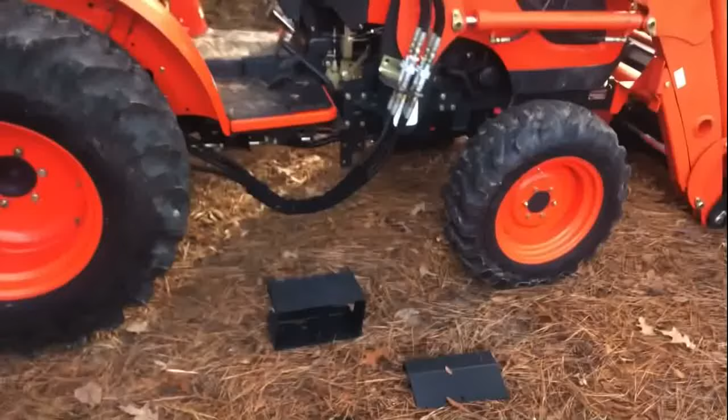Okay, so my grapple that I have on the front of the tractor, which is not on right now, has been running off of rear remotes, and they were coming off from back here running underneath the tractor. They were actually ran through that little foot pedal bracket underneath there, which was causing my pedal to hang up a little bit, and strapped up, come up the loader arm and just were hanging in the front. And I wanted to go to a true third function kit.

So I bought the Kioti third function kit. I think I'll be able to handle it. I went ahead and mounted this bracket here. That was a no-brainer. And I mounted that bracket there, no-brainer, because those things were obvious. But the rest of the stuff I'm going to try to do in order. And so far, like I said, I haven't done it in order yet, but we're going to do the rest of it in order.

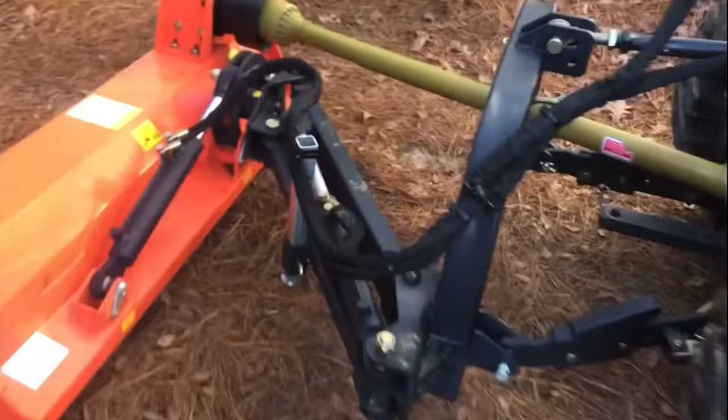And the reason why I wanted to get a true Kioti third function kit is because we got this flail mower, which has two hydraulic cylinders. And so I needed my rear remotes to operate this implement, or attachment. So that's one of the reasons. The other reason is because there are times when using these levers here to operate the front grapple, which I have parked over in the woods right there, would be a little tricky.

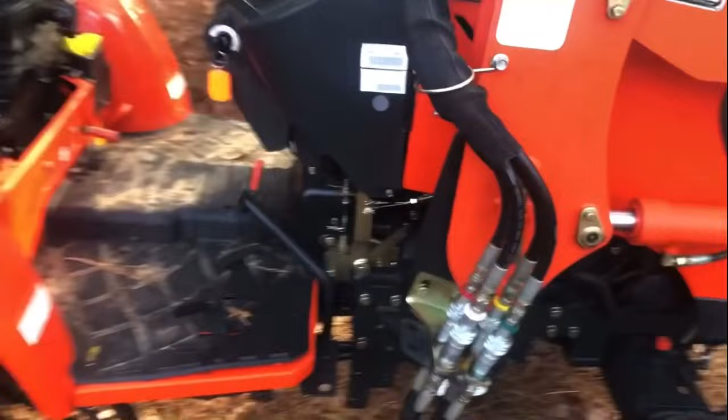So I said, you know what, I'm going to go ahead and get a true third function, and we're going to try to install that today. I'm going to put this video together in pieces as I go and fill you in on my experiences.

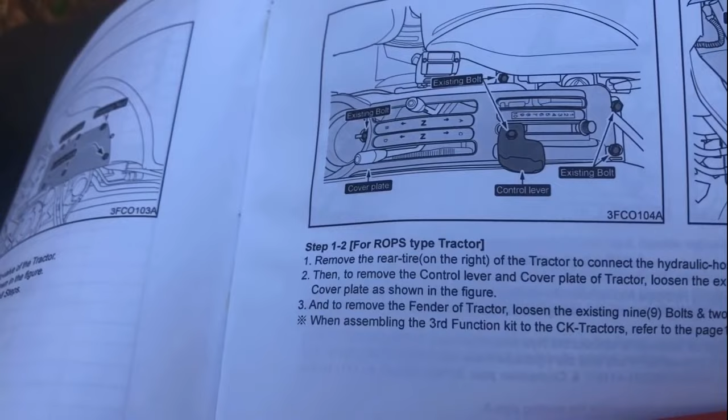Okay, so for step one, it says remove the rear tire on the right side of the tractor to connect the hydraulic hoses to the hydraulic valve of the tractor. And to remove the fender of the tractor, loosen the existing 9 bolts and 2 nuts as shown in the figure. When assembling the third function kit to the CK tractors, refer to pages 1 and 2, parts layout of all steps.

Okay, so we've detached the rear flail mower, and we're going to proceed with removing this tire. Now, ideally, I'd have a nice level ground spot, but this is what I've got to work with right here. I don't have a nice concrete shop floor, so we'll be doing this out here, and I'm gonna throw some cardboard and plywood underneath it to try to catch anything that I drop. Okay, so I've got my cardboard in place. I've got some blocks that we're gonna put the rear axle on this side, and my cheater pipe to break these nuts loose.

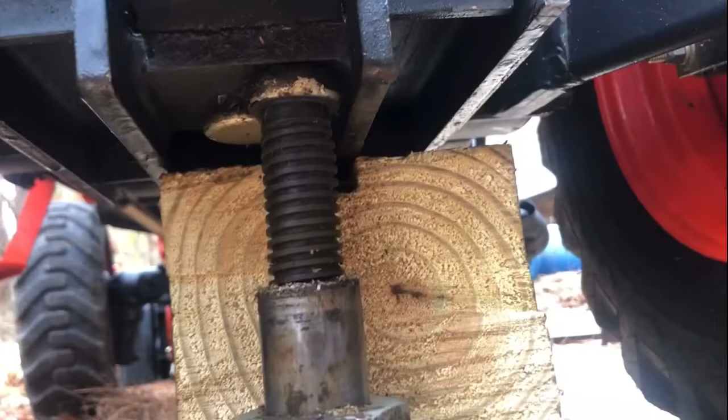Okay, so I jacked my tractor up just slightly on the right side of that tow bar pin, and I've got some blocks that I'll lower it down on once I get the tire removed. And you can see here I'm just taking these nuts off, and we'll just roll the tire to the side. So that's where we are right now, just loosening these up. Excuse the quality of the video, just trying to show you the various steps.

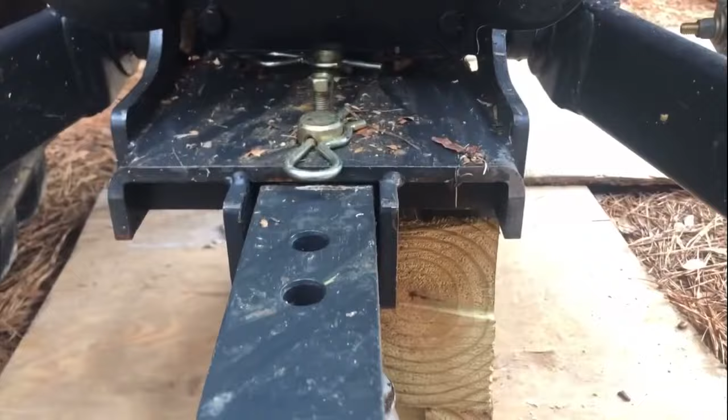Well, believe it or not, that wasn't that bad. So now we're just going to lower the jack onto these blocks of wood for a physical instead of a hydraulic hold. You can see it drop down. So we are good now, and proceed to the next step. That was actually pretty simple.

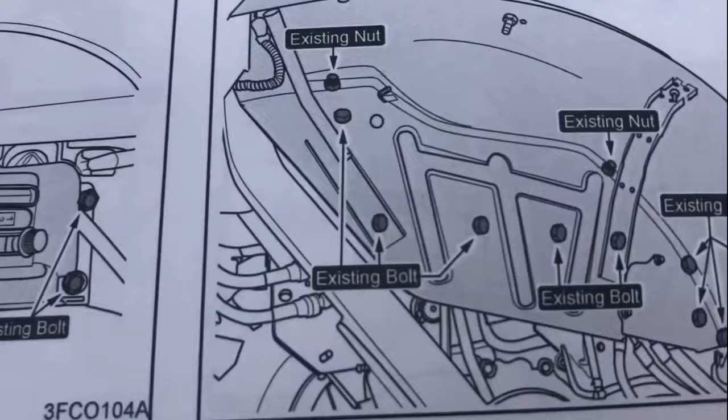Okay, so it says next, to remove the fender, loosen the existing 9 bolts and the 2 nuts as shown in the figure. So here is the figure. Okay, so up here you need to disconnect this plug here for your rear blinker, and also pull these out. Green goes to red and black goes to black. So that way when you take this panel off, you don't tear up your wiring.

Okay, so these plugs that I just talked about had to go through those 2 holes. There was a rubber gasket there. You just pop it out and it slips through. Okay, so now the fender is off. Wiring harness for the lights are out of the way, and we'll proceed to the next step. So there's our fender with our bolts and our tire. Things are going good.

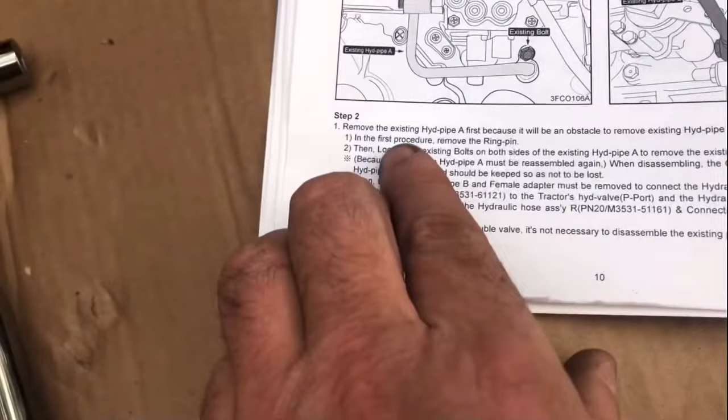Okay, so next it says remove the existing hydro pipe A first, because it will be an obstacle to remove existing pipe B.

So that's existing hydro pipe A, and this is existing hydro pipe B. B is above A. So here's A and here's B. This is the top of A right there, and so B is going to be right here.

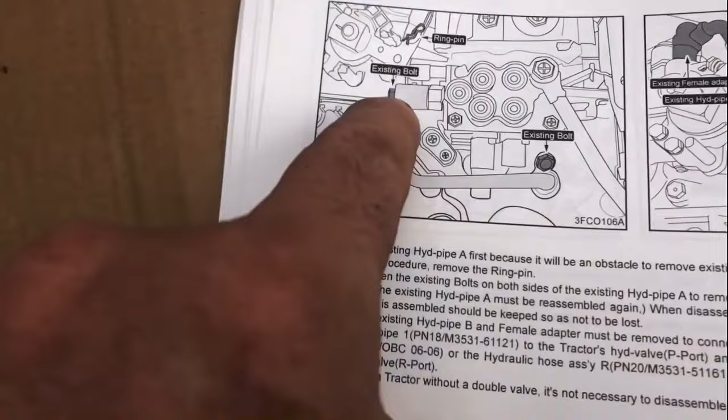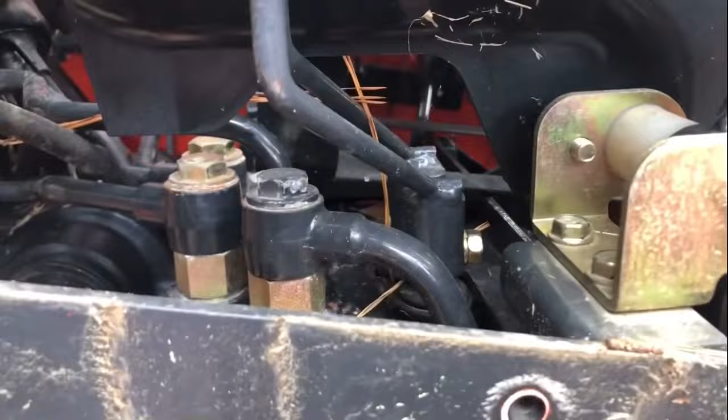If we look at the tractor, here is A, and then B is right above it. B goes up diagonally to the top through this, behind that linkage there. That stuff's all in the way, but that's the top of B. There's the bottom of B, and there's the top of B.

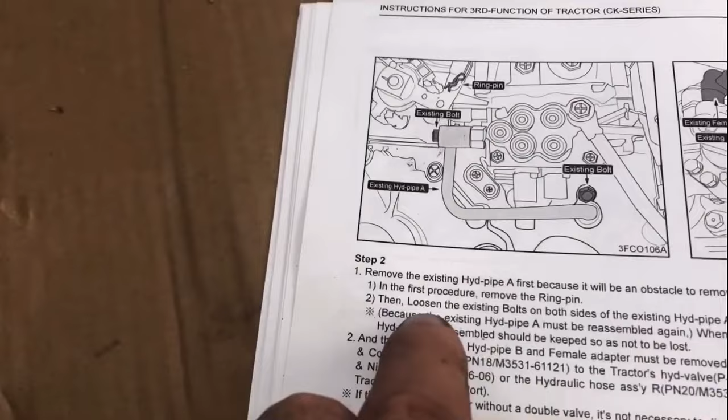And then here's A. If we're going to remove A, it says loosen the existing bolts. In the first procedure, remove the ring pin. There's your ring pin right there. We'll put this in a bag. I'll put it right here actually. First procedure, remove the ring pin.

Then loosen the existing bolts on both sides of the existing hydro pipe A to remove the existing hydro pipe A. So we're going to have to loosen this bolt here and this bolt above right there. So they're going to loosen that bolt and then this bolt.

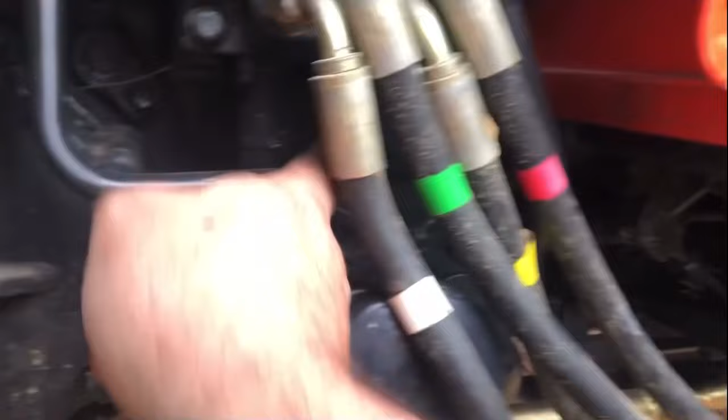So for me to get to the top of this A over here, I have to come in through here, and my socket is just barely short. Now, in the pictures, in every tractor I've noticed this top hydraulic line was pointed off this direction, and mine's pointed this direction, which makes it really tight. So I'm going to remove this and put it back at this angle like in the picture and see if that provides a little slack.

That'll allow me to also turn this one a little steeper so it won't be coming over my filter here, which is something else I've noticed that seems atypical. Does that matter? No, but I'm going to get this arrangement of hoses lined up a little better so I have clearance to reach that bolt. I've changed the orientation of these hydraulic lines, and it makes a difference on multiple things, which I'm going to point out.

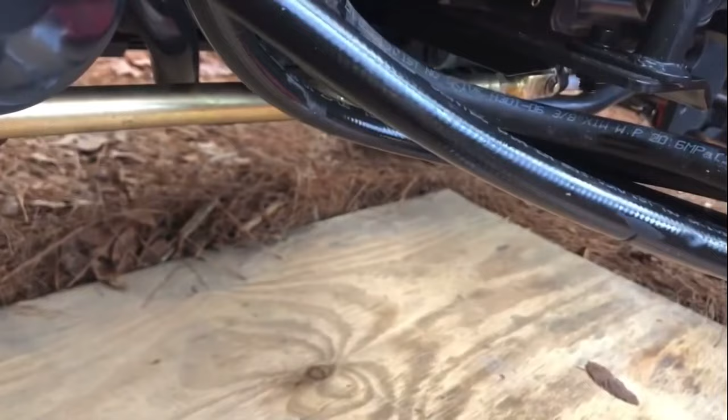It's my understanding, I can't swear this is true, but I believe the dealers actually mount the front end loaders to these tractors, and if that's true, the dealer would have mounted these, and the orientation did actually matter. They also had my lines ran through this bracket here, which in my opinion was not a good idea because it would cause my steps to sometimes stick, and I noticed it was rubbing on one of my lines here. I'm not sure which one, but one of these lines has a little wear on it.

So when I put this bracket on, I pulled the hoses out of this sock and took them out of that step. But to keep them from snagging, I can easily pop them up in there and put a zip tie on the back side, and they'll still be elevated without hitting my hydrostatic pedal. The other thing is, now I've got enough gap that I can fit this wrench in here and get on that bolt. Barely, but I'm on it. This eliminates that problem just by having these hoses oriented the right direction.

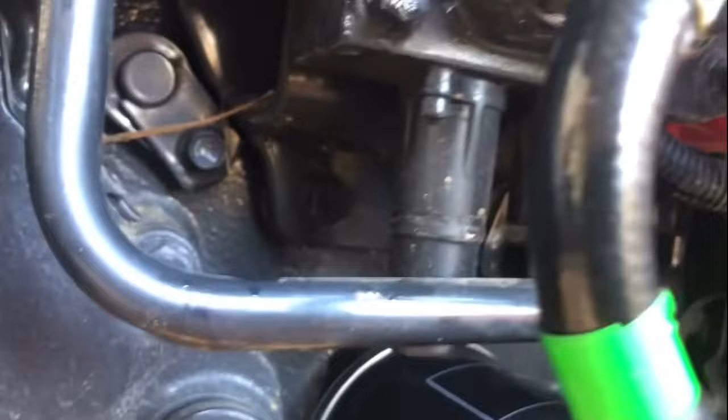Okay, so I got that front bolt, let's see if we can find it here in the camera. I got that front bolt off right there. You can barely see it between those two right there. That's it, got it out.

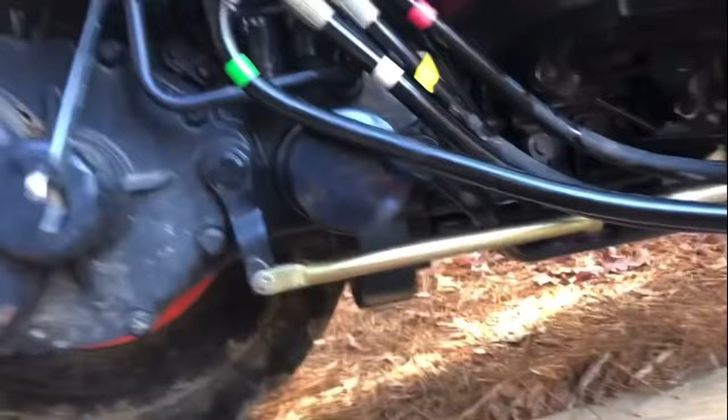Now this one here is pretty darn snug. We've got a 19mm wrench on it, so I'm actually going to have to try to put a pipe on there or something, it will not come loose. Well, I'm going to crank on it and see what happens. My pipe won't fit, so I'll just pull a little harder and break that free. Of course, lefty loosey.

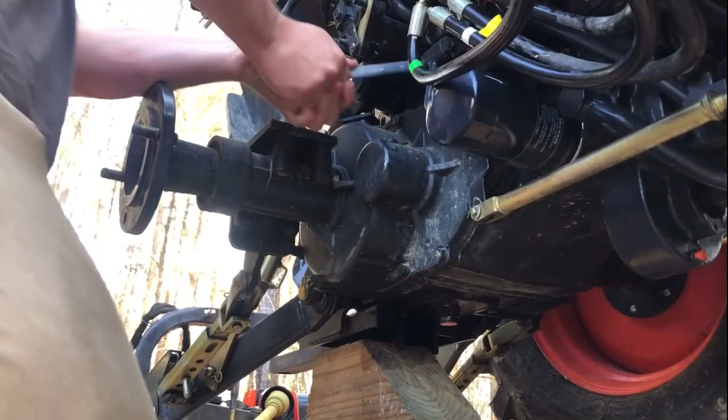I don't know if my alignment there is good, hopefully it'll work. There we go, may have been painted on, I don't know. It actually came off easier than I thought. I snugged on it a little bit, but I only did it with one hand the first time, and it was tight. But there, it's coming off pretty easy, so my bad, it was not too tight, I didn't need a pipe. So that's good when things work well.

So this should allow me to remove pipe A, what they call pipe A. Of course, we're going to save this here. It's got a little hydraulic fluid on it, let me clean that off so it doesn't drip too much in my socket set. Now this should come on out now. There we go, look at there.

It must have a sleeve on it. Well, it's loose. There it comes. All right. Yeah, I knew it had to have a sleeve on it the way it was not just pulling out.

So we got that off, and things are coming along. So far, not too bad. I'm pleasantly pleased with the way things are going. So let's see what's next.

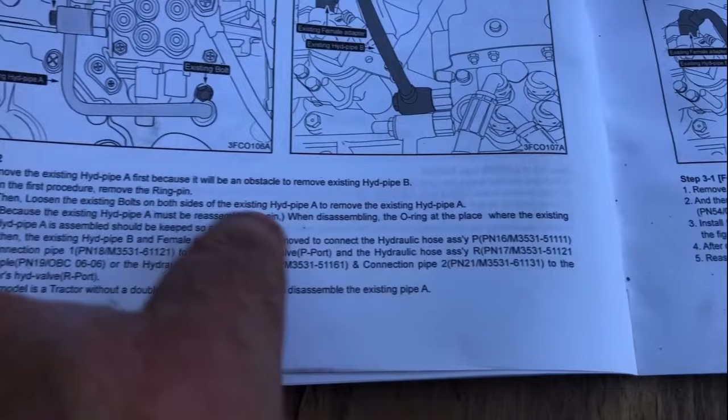It said after removing pipe A, that A must be reassembled when assembling the O-ring. When disassembling the O-ring at the place where it is existing, Hyd-pipe A assembled should be kept so it's not lost. So we kept those O-rings right there, and of course there's an O-ring on there. Let's see, and there's an O-ring there.

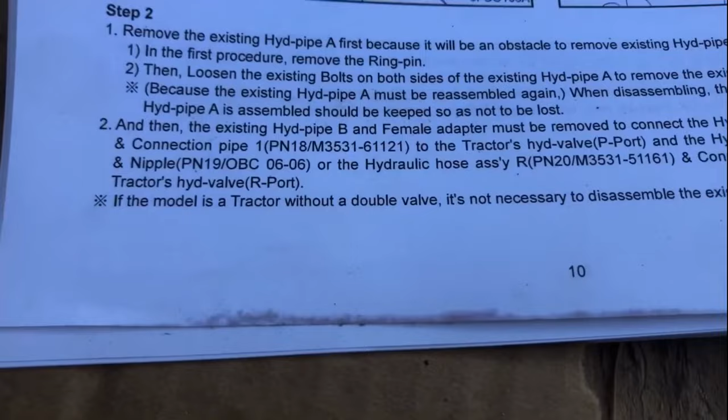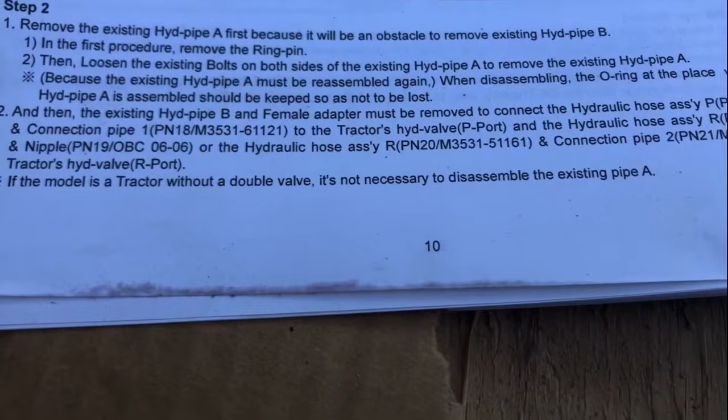Okay, next it says number 2: the existing Hyd-pipe B and female adapter must be removed to connect the hydraulic hose assembly PN16. So we're going to put the PN16 on there with the nipple PN19, or hydraulic hose assembly RPN20, and connect pipe 2 to the tractor's hydraulic valve R port. So we'll stop the video and get my hoses together for that.

So what we have to do now is remove this one and this one. Okay, so my next dilemma here is when I loosen this bolt, this spins with it. So I've got to find a way to stop that from spinning. On the pipe A, that was not a problem - that was pretty rigid and it unscrewed.

But on this B, every time I turn this one counterclockwise, that one just turns with it. So we're going to have to find a way to hold that. And I don't want to really remove this one. So we'll see if I have a crescent wrench long enough to reach over both of these to grab that one and see how that works.

Okay, so I noticed there was a second clip up here for that rear remote. So I've removed that second clip, which allowed me to remove this piece here and get it out of the way. It gave me more room. And I noticed that because as I was trying to loosen this...

19mm nut right here, it slipped and I had a knuckle buster. The joy of being a mechanic - as I pulled that wrench, it hit there. So I have to put a crescent wrench on this nut, because that nut is just turning as I turn this nut, which allows the whole thing to just spin. So that obviously is not going to work.

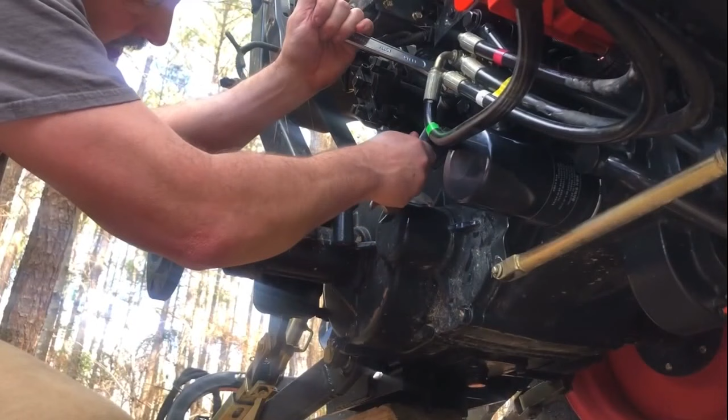Don't know how this angle's looking on this camera, but hopefully it'll work. I'm going to turn it this way so I don't bust my knuckles again. There we go, got it. Now we got that out, we can use the other end to get that off. So that was absolutely necessary to get a crescent wrench to stop that from counter turning.

Okay, so we'll just remove that pipe B now, and we'll pause the video. So I'm just going to take that out. Take this nut out, pull this end off, and we'll take that nut out and pull that off.

Okay, so we've got that nut removed, and we maybe lost 2 ounces of hydraulic fluid. Nothing to get upset or excited about. And now we're going to remove this nut here, and hopefully that nut down underneath doesn't spin. We'll see how that goes. All right, good.

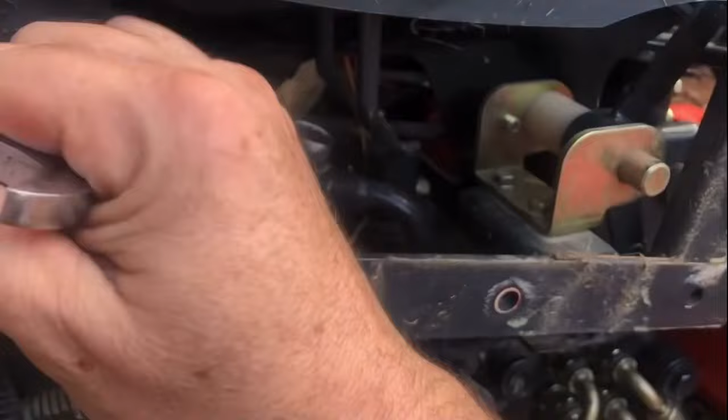So now we'll just continue to remove this so we can get pipe B out of the way. Make sure you keep your gaskets. You'll have to excuse any poor camera work, I have not done this before, so we don't want to lose anything.

I'm going to set the camera down and get this out. Okay, now it says that once you get that piece out, you're going to connect that new assembly into where we just removed B. So now that I've got B out, we've got two open spots here.

These are vertical, so I'm not too worried about that, but I went ahead and put that bolt in there to prevent any dust from blowing in there while I'm working outdoors, because we're having some windy weather and I don't want any pine straw to fall into that hydraulic system. So I just put that in there to seal it until I proceed to the next step.

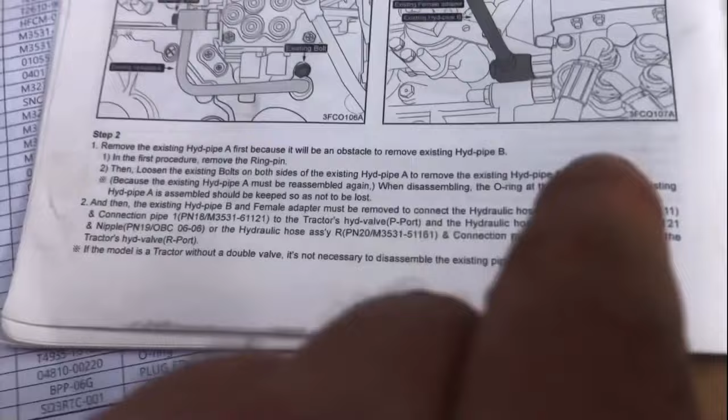Okay, so when we're installing these new hydraulic pipe fittings, I was running into a little bit of confusion, and then I realized what's going on. If we look at the part number here in these manuals, those are not correct. But if we look at the item number, the real part number after that slash mark, those are correct. So we have to use these numbers and not the PN numbers, okay?

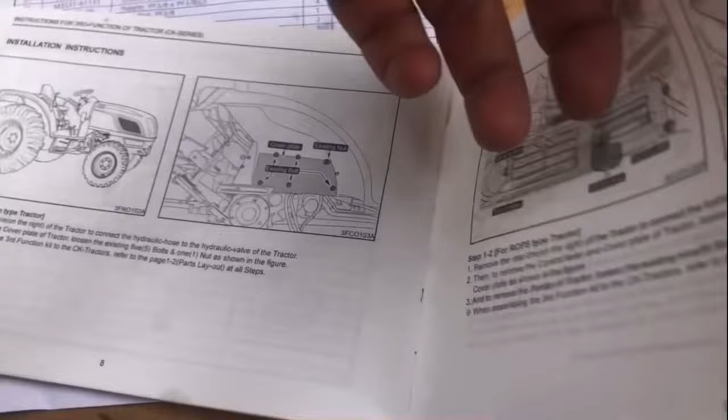That's issue number one. The second thing is that I don't have a cab tractor. So I was doing step 2, and step 2 is described - if you look, it says for the ROPS type tractor for step 1, for the cabin type tractor step 1, but when you get to step 2, it doesn't specify what. So I was going through this, and I noticed that some of the things I was looking at didn't quite actually match what I was looking at as I was transitioning from step 2 to step 3.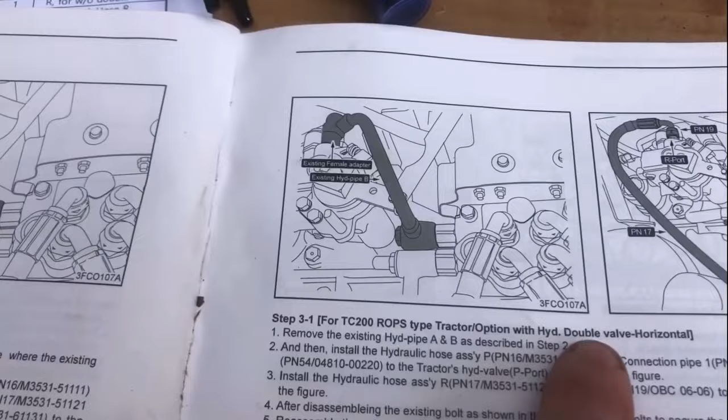Now, this is what I have. I have a ROPS type tractor with a hydraulic double valve horizontal. The first time I read this, I must have been on this page, because it said the cabin or ROPS type tractor with the hydraulic double valve vertical. And mine does not look like this - this is the vertical valve. So that was causing me a little confusion.

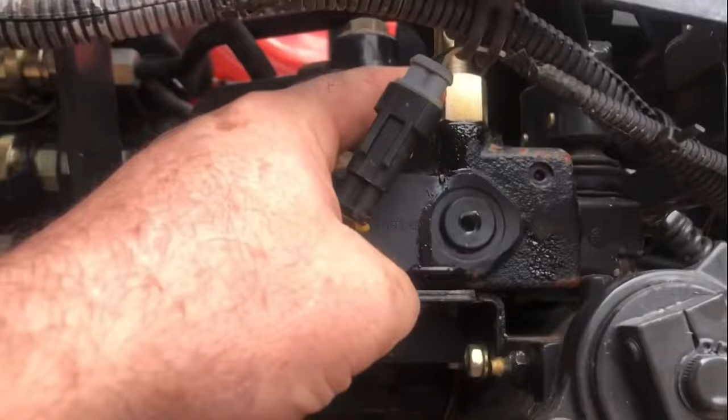We go back to this picture, and I have the horizontal double valve. So if we look at it here, you can see there's a little cap on the back - I'll call that the cap. Then we have our valves, and there's the top. So here's the top where I put that bolt in that I was talking about, and here's a cap on the back. This is my hydraulic double valve horizontal.

On the other one, it's vertical, and that's for the cabin type, and apparently for some of the ROPS type tractors as well. So we don't need to use this page at all - that's not my system. And we don't need to use this page at all; this is for without a hydraulic double valve. So we're going to be following these steps here and proceed.

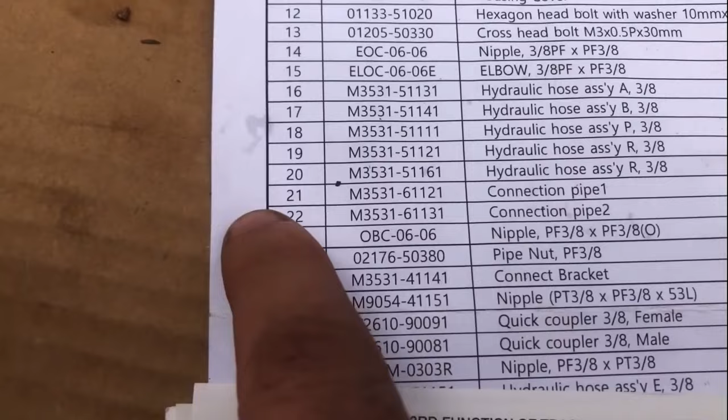As a result of that, I need to use - it says here part number 18. It is not number 18. On mine, it's part number 21. So we're going to use connection pipe number 21, and they call it pipe number 18. That's the one bit of confusion. And so this is the page.

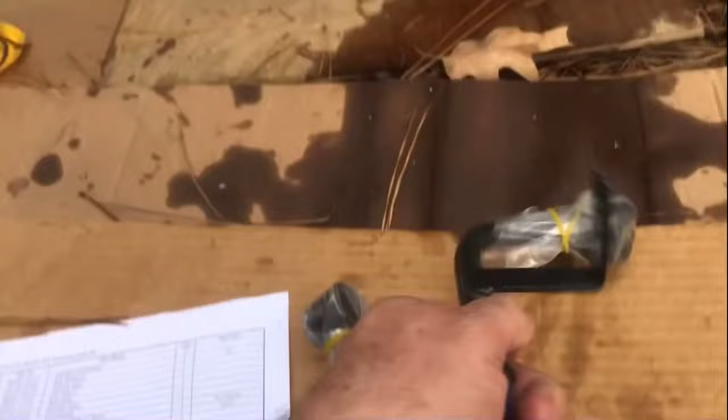Don't worry about the PN numbers if you get this kit. Use the actual numbers that are following that, and that will help. So we're going to go ahead, and this part here is going to go right there, okay? And then we'll mount that and proceed. We also need to mount the hose.

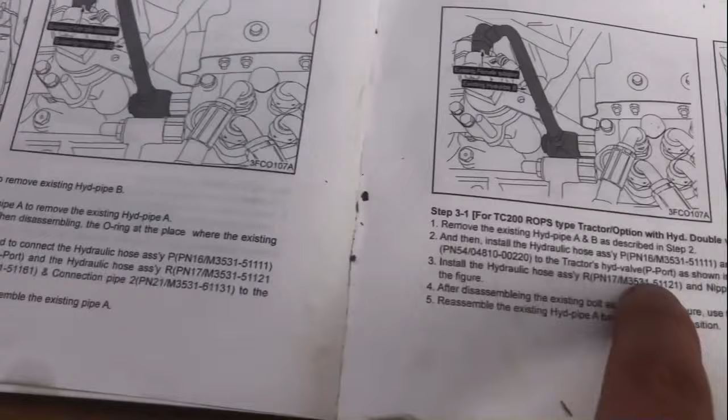Hose 51111, they call it part 16. We're gonna get part number 51111, come over here - 51111. On mine, that's part 18. It's actually hose P. Let me find where that goes. They call it 16, and we're gonna look at the picture here. So 16, which is in mine, 1111, 18, and 18 is P.

We're gonna connect P to the bottom of this item here. And then the other one, number 17, which is 51121 - that's 19 for me, that's R. R is going to connect to the return. So that's gonna be my R line, and then this will be my P line.

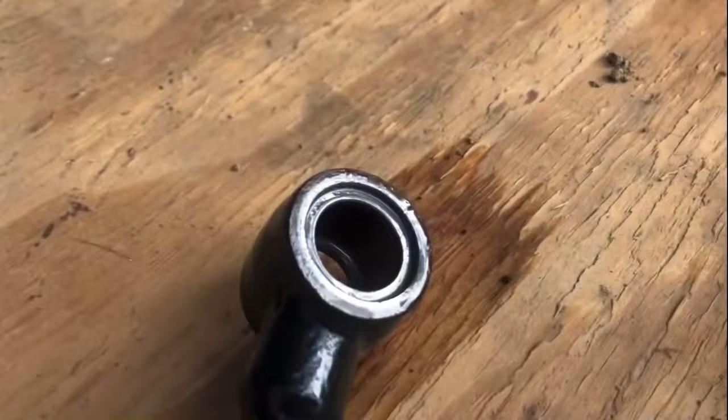Okay, so you want to take the green gaskets out of their O-rings and put them in here when you install this onto that location.

Okay, so we got this pipe here. Now we just need to tighten up that bolt that holds this support bracket, and then tighten this up, and that'll be good. And something else, I've heard a lot of people talk about this missing Alemite they can't find it, the Zerk. Well, there's your Zerk.

For your rear remote, or for your 3-point lift, I'll hit that while I have this fender off. And of course you don't want to forget that. That one probably doesn't need it as often as some, but you still want to hit it when you can. So there's that Zerk that people have a hard time finding.

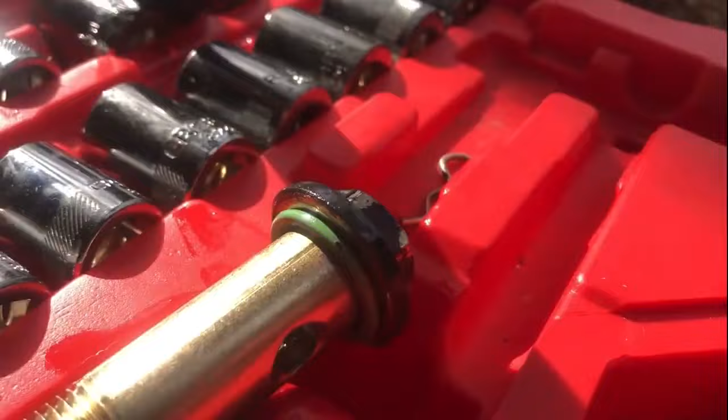Okay, so when it comes to those gaskets, those little O-rings that you see there, they did actually include some new O-rings with the kit. I don't think that's a critical deal.

Also, I like to use a little bit of this thread locker sealant material. I don't want to use Teflon tape on a hydraulic system, and I always put my fittings on before I apply that thread locker, because I don't want to get this into the hydraulic system. And so then I just tighten that up, and we'll put a wrench on it and tighten it up to make sure that's a good seal. We don't want any hydraulic leaks.

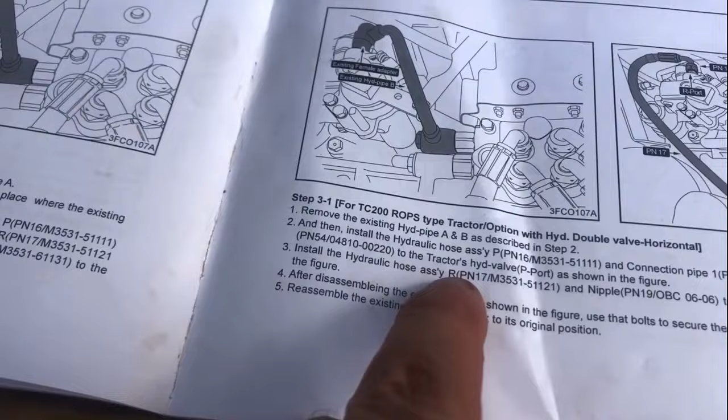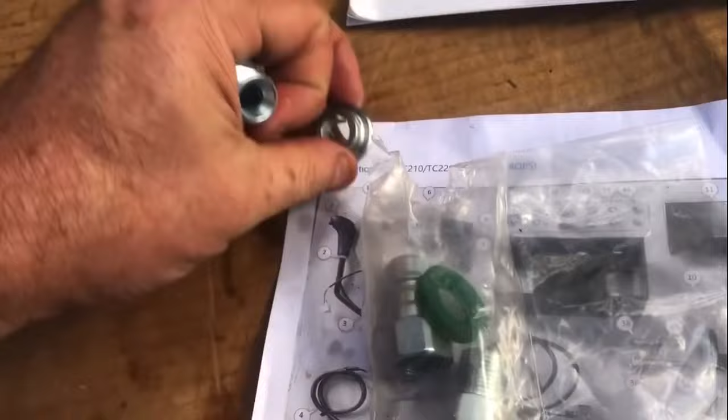Okay, so now it says to take the R hose and the nipple PN19. Well, PN19 in my instructions again is a different number. But I was able to figure out by looking at the number at 0606 that is going to be number 14 for me. And for number 14 right here is this item, and I'm supposed to have 2 of them, and it was in this bag, which was already open, and there was only 1 of them in there. So I'm a little concerned that I may be missing a part.

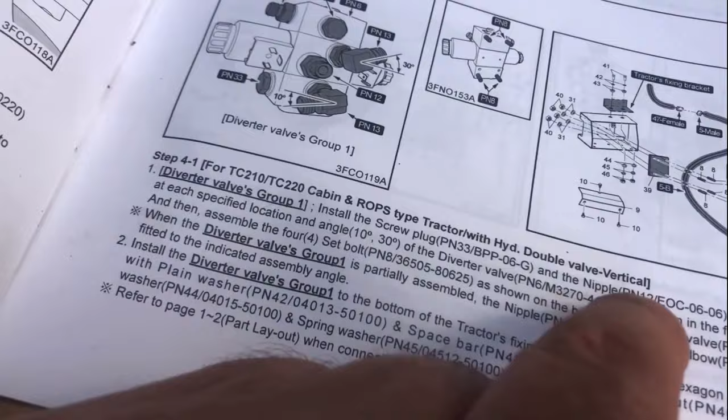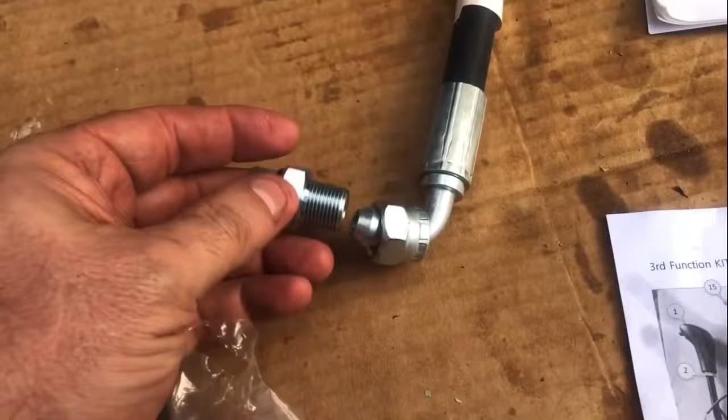I thumbed through the pages, and the only other time I see this item number 0606 is right here, and they refer to it as PN12, and PN12 is right there on the valve body. So I looked at my valve body, and it's already on there. So I think I'm good. Somebody has put this together and taken that out of that bag and put it on that valve body. So we are going to proceed and install this here, and then that'll be inserted to right there.

Okay, so before we can insert that nipple adapter, we have to remove this female adapter here. Okay, that came out super easy. So now we're just going to screw this one in. And we'll tighten that up. Okay, so we've got that nice and connected. That hose is going to be behind the fender there, so we don't have to worry about the tire. It's going to all clear nicely.

And after getting that all mounted, and I did call this a valve body, maybe called a diverter, regardless. So now it's time to reattach pipe A. It says reassemble existing hydraulic pipe A back to its original position. And so that's going to be this. It's going to have to go in here. See if we can, and you want to make sure that you have your O-rings on both sides.

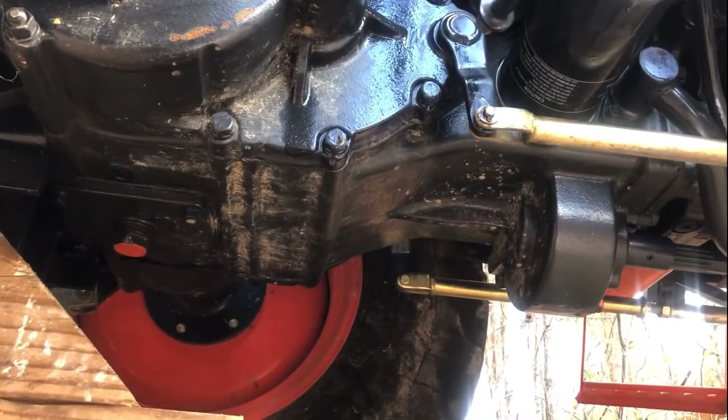So I'm going to try to set this down. My apologies on the camera work, I don't know, can't see the screen. I'm going to try to get this up into here and get this side over on the right, back lined up, and there we go. I'll have to wiggle that in. There he goes, it just went in. And we're going to tighten that back up.

So I just got the A back in here. We've got that. I'm just going to put it loose, make sure we have that bolt that we have to put back in. That was on my socket from earlier. So that's going to be this bolt here, has to go back up in there.

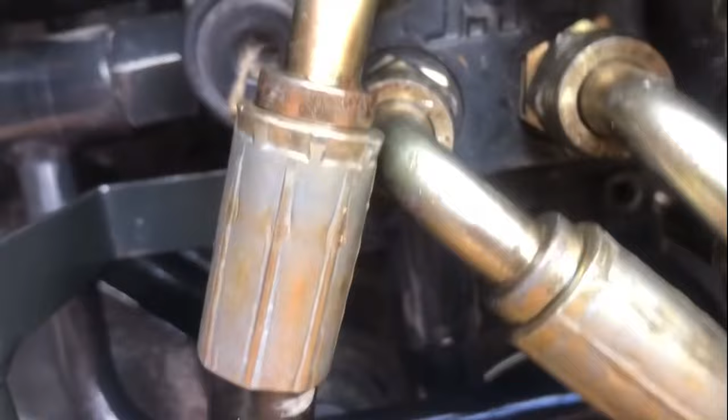So we'll feed that through that socket set right up through there. Let's see if we can see it. Right there, right there. I've got an extension here, and we're going to come through these hoses that I was talking about earlier. And then once we get past those hoses, we're going to guide that up into the hole right there. And we want to make sure that we have our connection straight, because we don't want to cross thread this.

So I'm just going to do it gently, and hopefully it goes right in. Looks like it's going nice and fine here. If I can, there we go. Now you can see it.

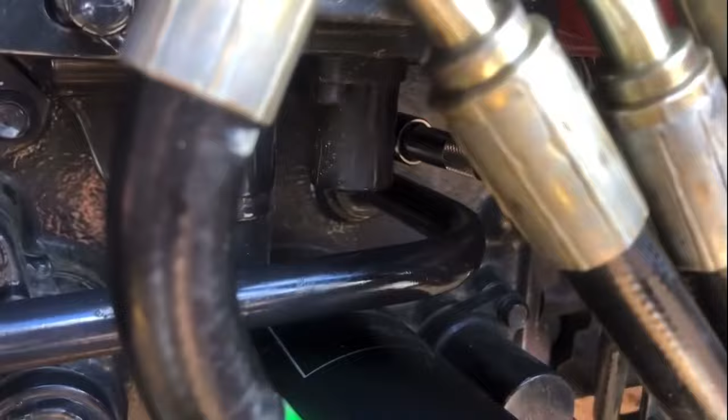And this bolt was a little longer than I would have thought it would be, but you know, it's got to hold that hydraulics pipe A tight. So there we go. All right, so we're done with up here. I'm going to snug that in and we'll see what's next.

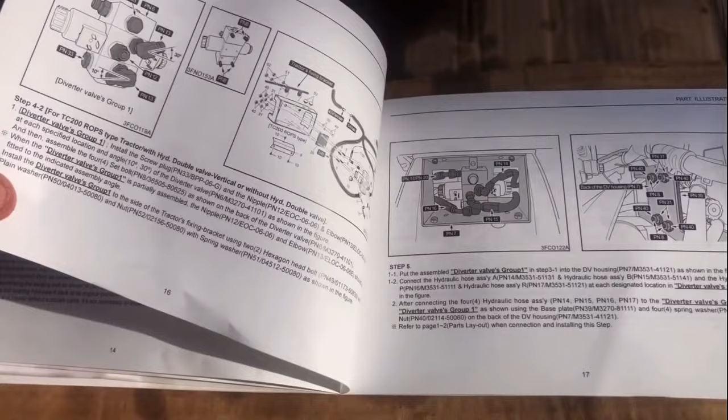Okay, so that was the end of step 3. Let's see step 4. These are with the double valve vertical and without the double valve. We have the double valve horizontal. So here we go. For cabin, that's vertical. We don't need that one. With vertical, step 5. Well, where's our step 4? Okay, so I don't see step 4 for my tractor.

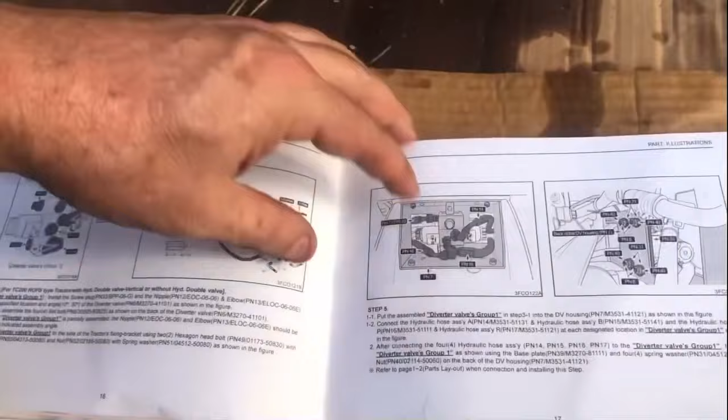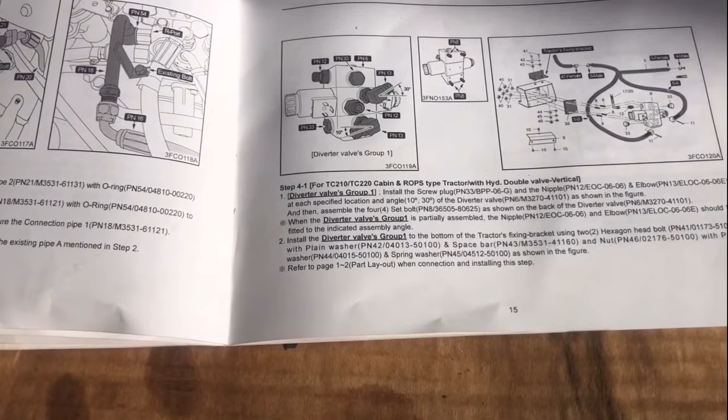Lovely. Okay, so I'm going to assume that I will run off of the instructions for the hydraulic double valve vertical. There's no directions in this manual for the hydraulic double valve horizontal. So we'll see here. It says diverter valve group 1. That's this picture here. All right, so that's going to be this unit. We'll open this up in a second.

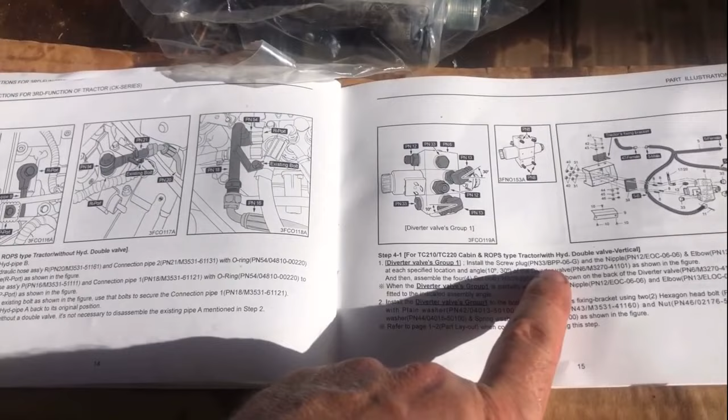Install screw PN 33. Now this already seems to be assembled here, which is to my advantage, to be honest with you. Okay, so it's in this orientation right there. Let's go ahead and take it out. Yeah, that's the orientation, because we got the knobs. I may have it upside down here. Yeah, we do. All right, so it's going to be in this orientation here.

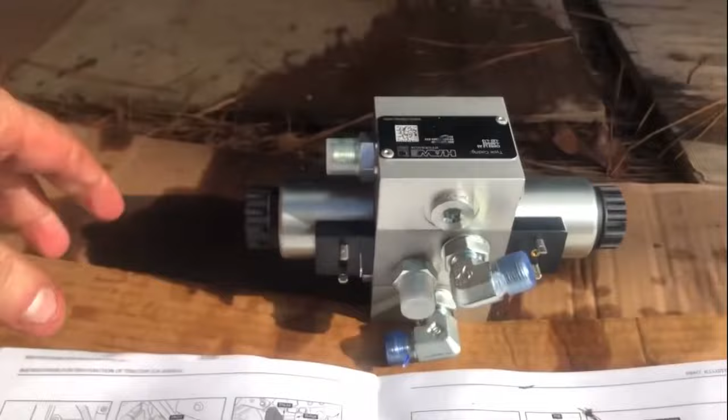Okay, so there's that PN12, which is that nipple I referred to earlier. It's already installed, so that's good. I don't know why this has a socket head in it, and on theirs it does not. But we won't worry about that just yet, and we'll continue and see what happens. I'll update you as I go. Okay, so next we're going to put these screws in, and just to prevent them from coming out, I'm going to put some medium strength Loctite on those threads into this diverter body.

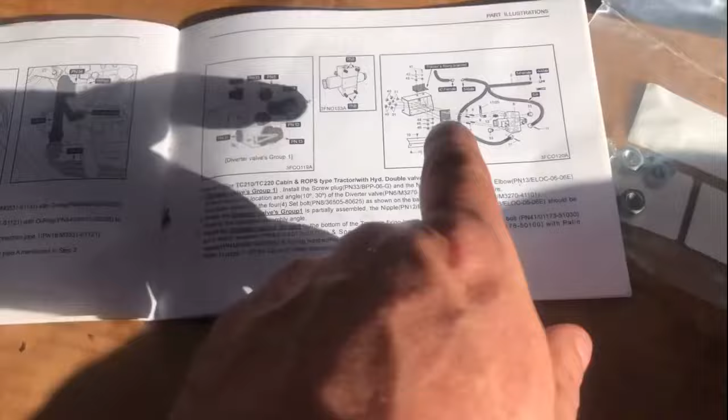Okay, so after looking into how I'm going to proceed with step 4, I've got to mount this box for the hydraulic diverter to my tractor. And here it says tractor's fixing bracket, and it shows these two holes mounting to the top of that box. That's these two holes right here on the top of my box. But I don't have those holes right here. I've got those out in the front, which is going to put that box too far away from my hydraulic lines. So that means I need to use these two mounts, and these two mounts are on the next page. So there they are right there.

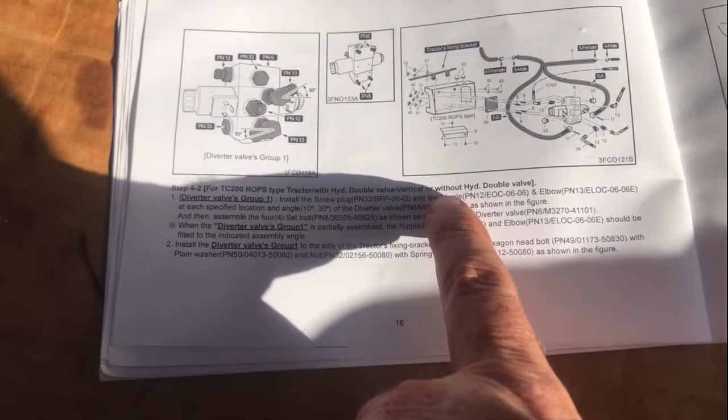So we're going to use the one that says with hydraulic double valve vertical or without hydraulic double valve, when it should be, for me, with the hydraulic double valve horizontal. So that may be a typo because they've got the vertical in there twice. Okay, so there's hydraulic vertical step 4.1. Here's step 4.2. So anyway, we're going to proceed with this mounting position. Okay, so I've installed my box onto those brackets right there. All right, we'll see what's next.

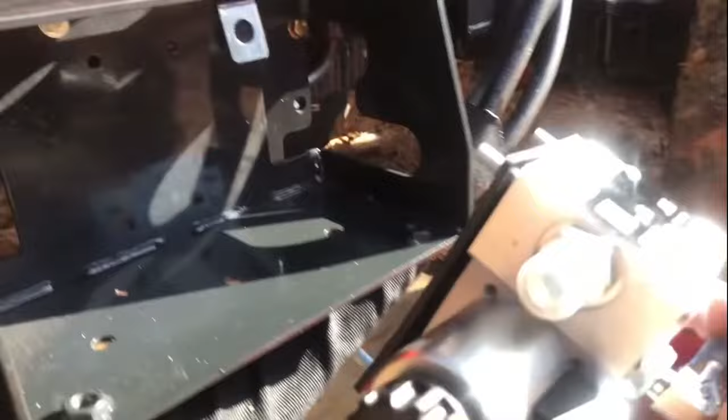Okay, so next we put this rubber thing on the back of here, and we're going to insert this into here. And then use these lock washers and bolts to secure that to that bracket right there. So you'll have to excuse my lighting here

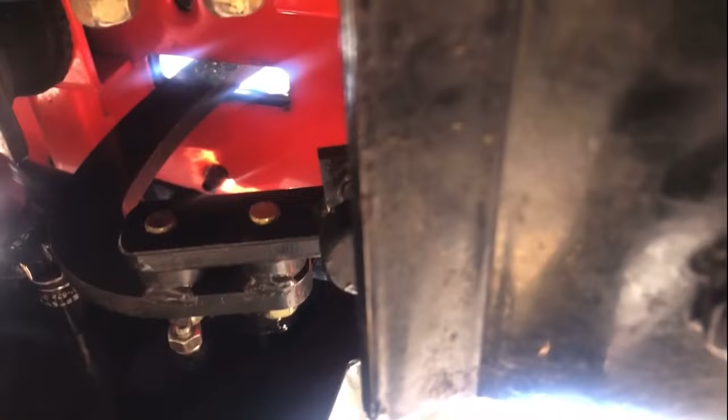as we adjust this. Okay, on the P line, you need the curved end over here to make it through and out of this box properly. And the booklet shows a curved end on both ends, but it's straight on this side. So put the straight end on your tractor end, and then the curved end over here.

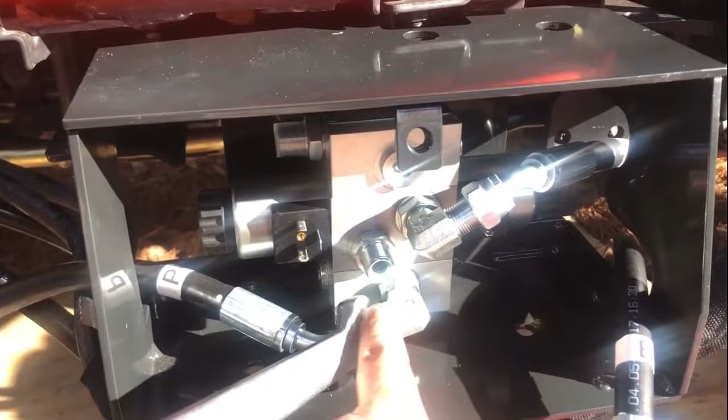Also, be careful about the order that you tighten these in, because you don't want to be wrenching on this the way it's mounted on. So you have to have room to get a secondary wrench, so you're not stressing the diverter when you tighten these fittings up. Don't want to get it in the hole, just on the outside.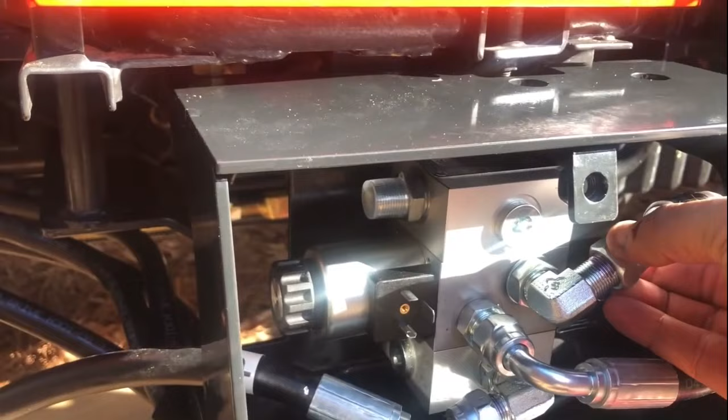And we'll just tighten these up. And then the R for our return line comes in the back, and it'll connect right there. So we have the power beyond, the return, then the A, and the B.

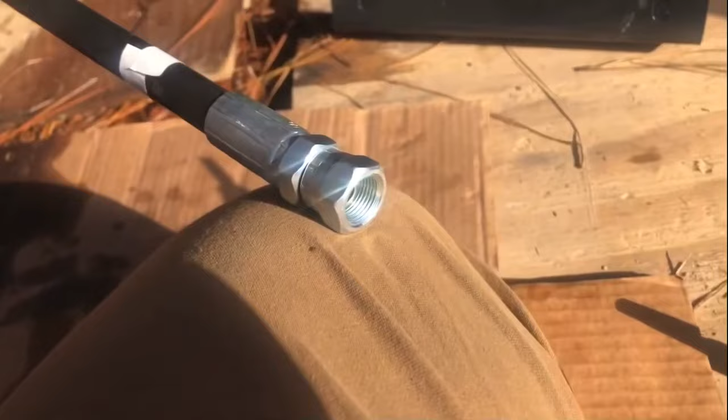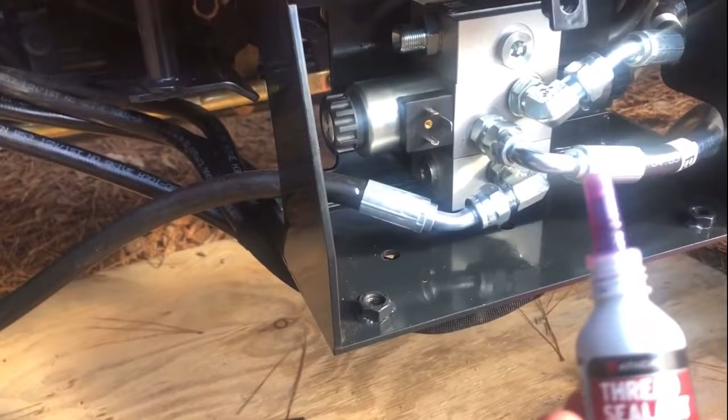All right, and something else, whenever I add thread locker sealant, I never put it on the female end, which pushes it into the line. I always put it on the male end. I've been told that Teflon tape will really tear up your hydraulic system, but that this stuff here, because it's not a fibrous material, when it's threaded, it actually supposedly can be broken down by hydraulic fluid. However, I don't know if that's true or not, so I only put it on the male end. That way it's pushed out of the hydraulic system instead of into the hydraulic system.

Okay, done here. Now this return line was a little bit hard to tighten up. I hope I got it tight enough. If not, I'll have to take the 4 bolts off the back of this to loosen this diverter up so I can tighten that down a little bit more. But I've got it pretty snug, and we've got everything done here, so for now.

Okay, so when I tightened these up, you can do them as long as you do them all in order. But if you put them in and then try to tighten them up, the fittings are going to be in the way of each other. So put them in order. I forgot the order that I did it. I think I started with the bottom, and then I was able to get all of them tight except for this one up here. There wasn't enough room to do this wrenching action to get that one tight.

You go up one way and then you turn it and go the other way, and you can slowly work your way into it. But by the time I was done, the head of the wrench in this area was just too thick for me to get enough rotation on there to even flip it over and come in from the other side. So I wasn't able to get this one snug. So what I did is I just went to Tractor Supply, and I can't remember if it's 21 or 22 millimeters, but regardless, it's the same size. This here is the same size as a 7/8.

And so I just got a cheap $10 7/8 wrench, and I ground on my belt sander this down and this down to make that thin enough that it would fit in there, and I could do a turn. And once I got it turned, then I could turn it over and get the next turn. With the full diameter and support on your wrench, I wasn't able to turn it far enough to flip it over and rotate it again.

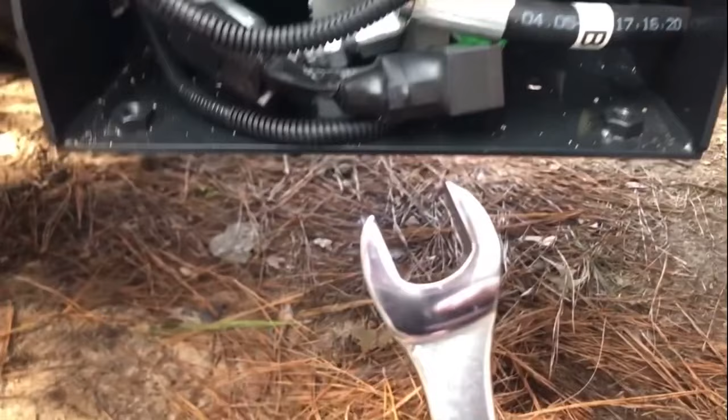So I just got a little cheap $10 wrench, and you know, somebody might say, well, you ruined that wrench. You know what, so what? It's a $10 wrench, who cares? And if I ever need a wrench in the future, odds are that little area is gonna be stronger than what I can push with my hand anyway. The only way I'm gonna probably break that is with a cheater pipe. So that allowed me to get these fittings all snug.

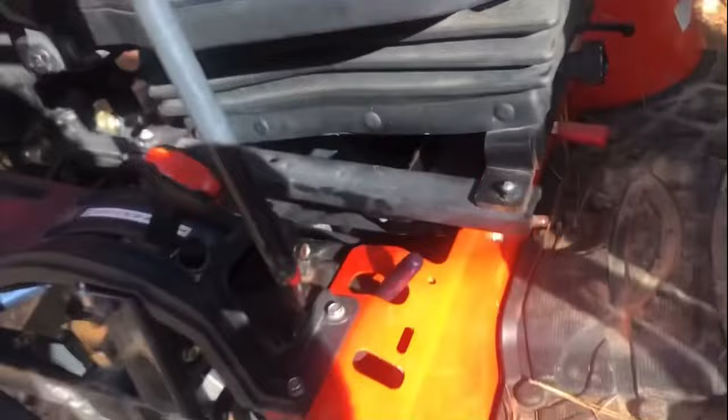So the next step is to exchange the joystick. And it says to remove the rubber boot from the base of the joystick to attach the new one. And so that's what we're fixing to do. And mine didn't have a rubber boot, so I don't know if it's because mine's a 2018, which is a couple years older, but otherwise we'll keep on going.

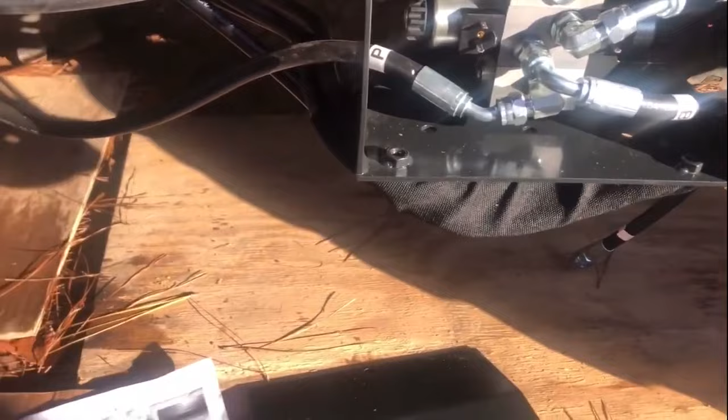Okay, so we got those 2 bolts out of the joystick, and there she just slips right off. Hopefully here, let's see. There she comes. Oh, there we go. All right, so we'll just put the new joystick on. Okay, so we got the new joystick mounted. I zip tied the line for the remote down. You're supposed to plug this in to this next line, which goes to these plugs that go onto the diverter. There's 2 of them. I just uncovered them, took them out. So things are progressing nicely. No problems except for crappy instructions.

Okay, so to prevent there from being any stress on this, I'm going to zip tie that up here somewhere so it'll be out of the way. And then this wire housing, it comes down in here, and you've got these 2 plugs, but it doesn't say which one goes on which side. So there's 2 of them, and so one's going to be for open, one's going to be for close. If I don't like the finger operation, these will just be switched.

Okay, another annoying thing, this plug is supposed to go right here, but they've got this too angled. You can't get it in. And they had that installation step before this installation step. This L90 here should be a little more vertical to get it out of the way of the plug. So I'm gonna have to adjust that.

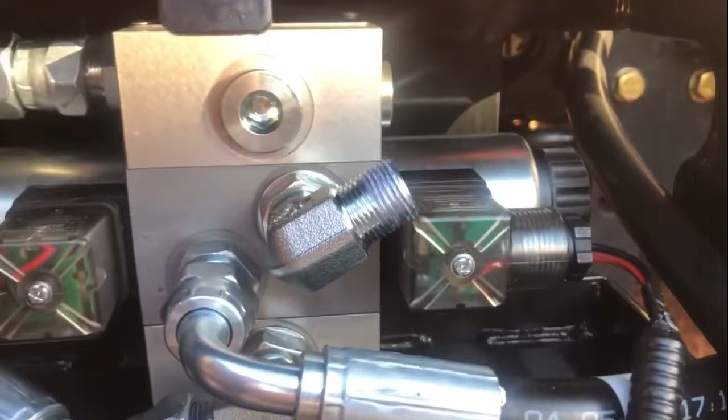Okay, so even with the hydraulic line disconnected, there's still not room there to get that fitting on. So this definitely needed to be more vertical. So I'm gonna have to try to turn that, and I hope I don't have to take this whole valve diverter out of the frame to turn that to a more vertical position.

So I put a cap on that and turned it back a little bit, and the plug will fit now. So I'm going to reconnect my hydraulic line and then put that fitting on there. I would like for that fitting to be able to go on and off of there with that connected, because if I want to flip them, I want to be able to.

Okay, so we've got all that clear, and there's screws here to secure these points. If I don't like them, I'll flip them, now that I've got room to get that in and out. And we put the thread locker stuff back on these threads, so they should all be sealed, and they're all fairly tight, so wish me luck as we proceed.

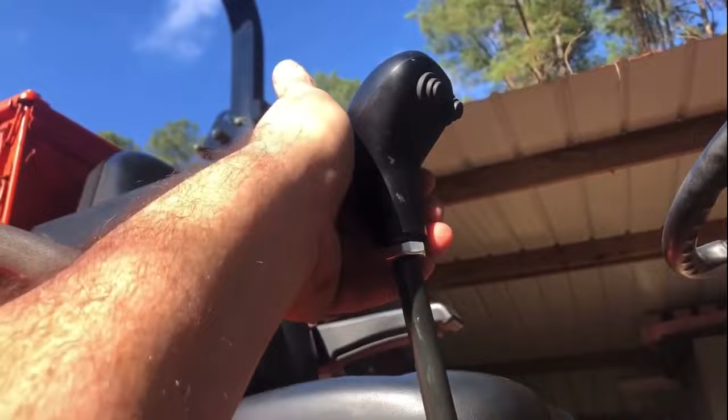Okay, so if you have it backwards, which I did, you just flip these 2. You want the inside one to be closed and the outside one to be open. And the reason why I say that is, at first I thought I had it right because I had the inside open and the outside closed. And closed being going down, you would think you'd want the close on the outside, which is the down function or dump function, and the open or up on the inside, which is the roll back function.

But you don't. You want it the way they have it in the manual. The manual shows this one as the close and this one as the open. And the reason you want this one as the open is because when you go to the dump, that's when you're going to open. And when you go to the lift, that's when you're going to close. So you want the close on the lift side or the roll back, and you want the dump or open on the roll forward or dump side. And so I had to flip these around because I had them backwards.

Okay, so I got another issue. Right here, I have the TC200 ROPS. I was finally able to figure that out because every time I found a section that worked for my tractor, it was the TC200. Well, that means this wire is supposed to be routed around this male plug. It looks like a female from the outside, but the plug itself is actually male. It's supposed to be routed around and go up to this section for the 200 ROPS right there.

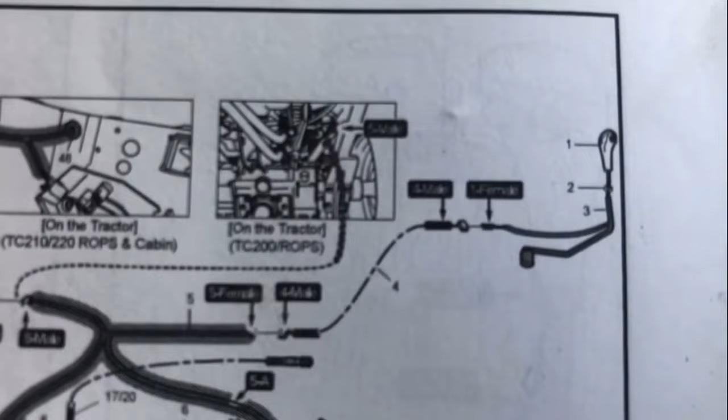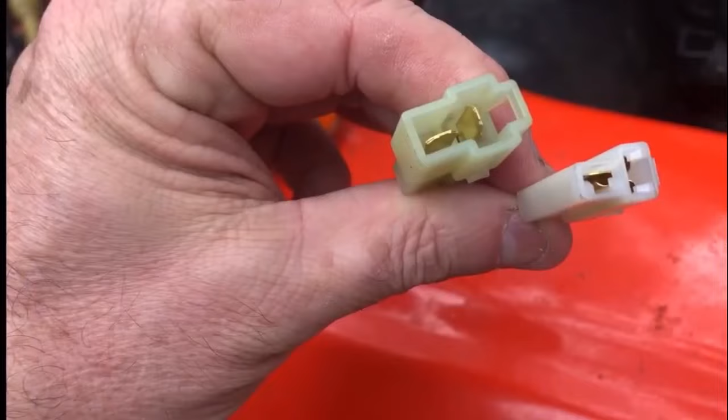And that means I'm supposed to have a plug above the rear right tire, a female plug that fixes into. Well, it's not this one because this goes to the blinker and whatnot on the fender and tail light, and this goes to my rear light. That was supposed to be a female plug, so unfortunately that has been removed. Okay, so I need one of each of these

two-way plugs. Okay, so we had to flip the connections to get my grapple open and close functions the way I want them to be and the way the manual recommends, which is close on the inside and open on the outside, which I thought would be backwards, but it actually makes sense intuitively because open is the dump and you want the dump on the dump side.

Also, before you connect and also before you disconnect, you want to make sure you have your key in the accessory position and relieve the pressure in these diverter lines, so that'll make connecting and disconnecting a lot easier when there's no pressure in the attachment or on the tractor side.